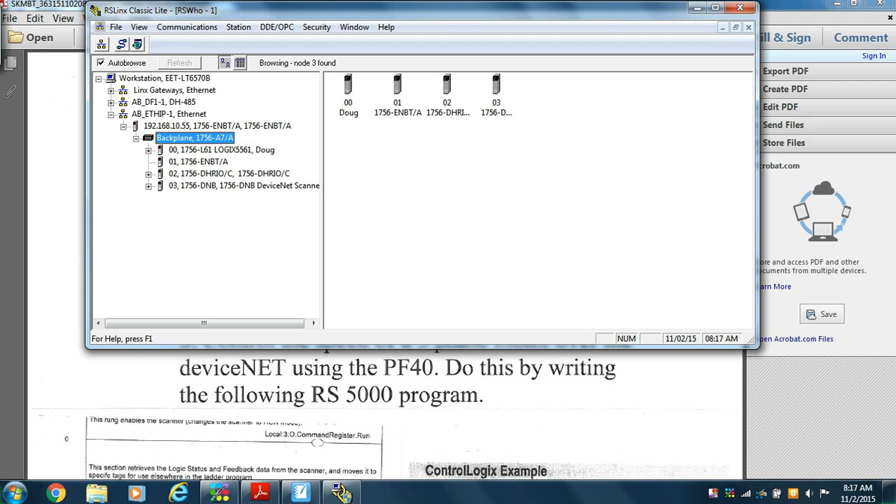And there's the DeviceNet scanner, the DeviceNet, and a whole lot of things on it, but I know that they're not there because I didn't hook them up. So those are things that are legacy items from this RSLinx and aren't necessarily there right now. So anyway, RSLinx is up and running. That's all we care about.

And then we're going to come up in a program called RSNetWorx for DeviceNet. RSNetWorx for the DeviceNet. And here we're going to make a program that sees only the things that we want it to see. And this particular program, when we save it, will have to go into our ControlLogix program, our RS5000 program. So that's why it says do this second.

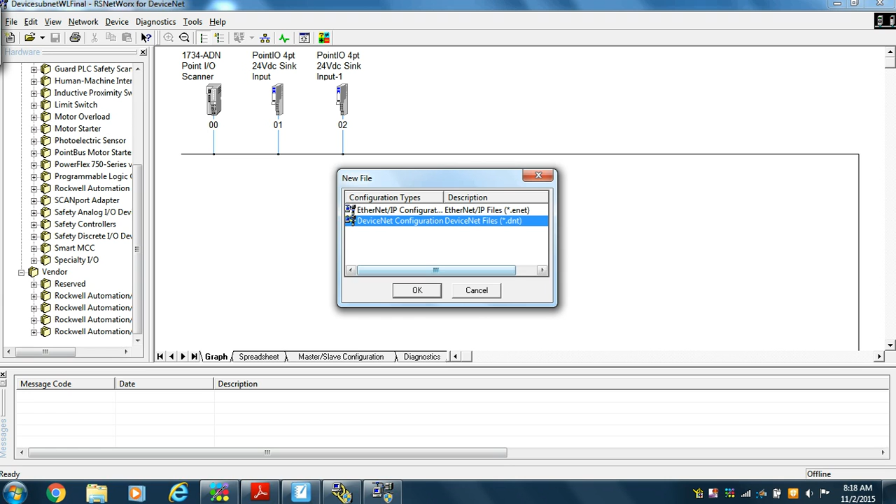The other thing you're going to need, which I already got, was the processor and the DeviceNet card that is in our ControlLogix. Okay, so what we're going to do is go to New, because obviously this is a new configuration and we want a new DeviceNet configuration. All right, and then we're going to go find it.

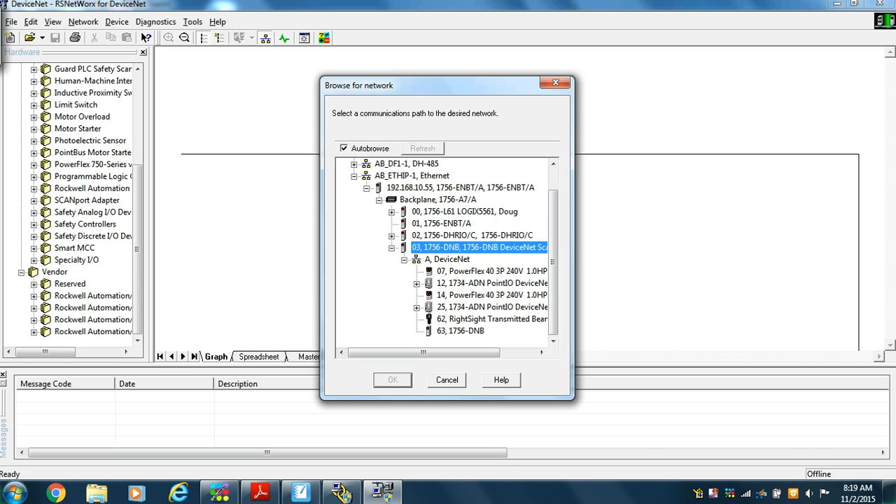And so there's 1, 2, 3, and there's the DeviceNet scanner, there's the DeviceNet. And you notice that when I was back on something else, we'll move back, the OK doesn't say OK. But as soon as I get to the DeviceNet, it says OK. So now I'm going to go and scan the network for the devices that are on it.

And this is going to take some time. So what I'm going to do is I'm going to stop the video. No, well, it's not going to take that long, I suppose. But it has to look for addresses all the way up to 63. And we're at 2 already. So we'll keep the video going just so you can see what it's doing. And there's the PowerFlex, so that was cool that we had its address be 7 so that it would get there soon and have something to look at.

The next thing we should see is probably the electric eye guy I have hooked onto the DeviceNet network right now that I was using to just see if I could see it. That will be the next guy we see. And then the DeviceNet scanner, I think, is all the way up at address 63. And we're gonna have to wait for this all to scan the whole network. We don't really have a choice there. So don't be hitting cancel. Don't be hitting the red mark. Let it do its thing.

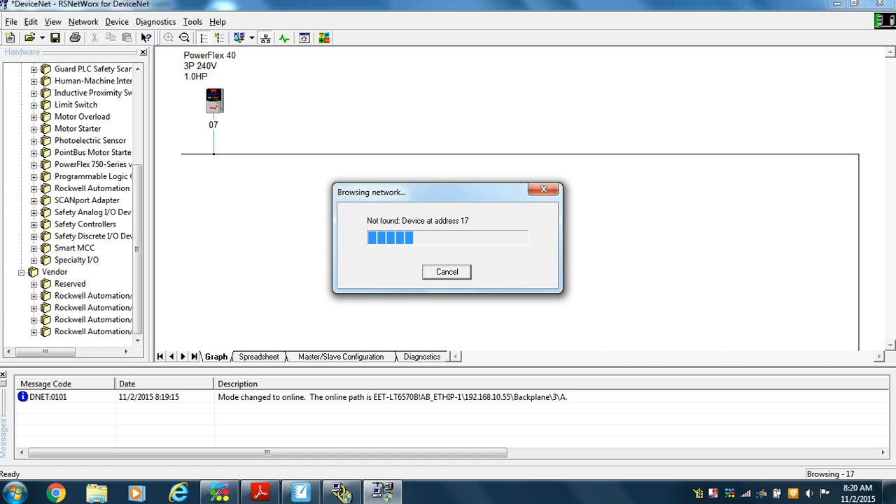So we made it all the way up to 63, and we see we do have an electric eye, and we're gonna cut it because we don't need it for this project. So that's what you do. You cut out anything that you don't necessarily need. The next thing we're going to do is we need to know everything there is to know about these devices. And that's something that we can't do manually.

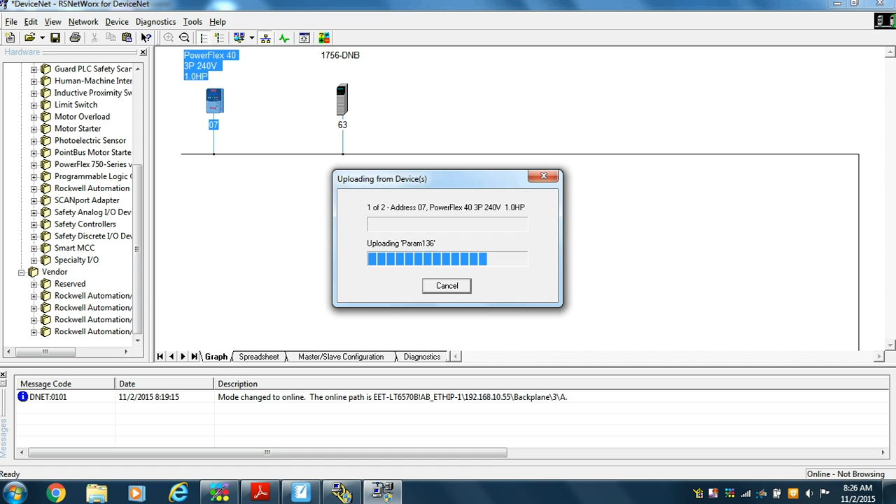So we're going to go to Network, and we're going to upload from the network everything that can possibly be known about these devices. So in the case of the PowerFlex, there's all the programming parameters that could be loaded in. In the case of the DeviceNet, there's all the locations and all the integer files that are associated with it. Okay, so now we have all that information.

We're going to click on the PowerFlex because we left it in 3-wire control and variable speed and frequency control 0 to 10 volts in our last project. And that's not exactly what we want. So we're going to go and group our parameters so that they're grouped. And we're going to look at the basic programming parameters first.

And we're going to say, well, the start source, we don't want it to be 3-wire control. We want it to be from the COM port.

Okay, and the frequency control, where's frequency? Right there. Speed reference is now 0 to 10 volts. No, we don't want that. We want it from the COM port. So now the COM port is going to be controlling whether or not it comes on and off.

Now, if you look at the diagram of the PowerFlex wiring diagram, you see that there's a wire hardwired in between pin 11 and pin 1. Currently that's not there. That's our emergency stop button on our last project. We're going to have to put that in order to make it work. I hope I remember to do that.

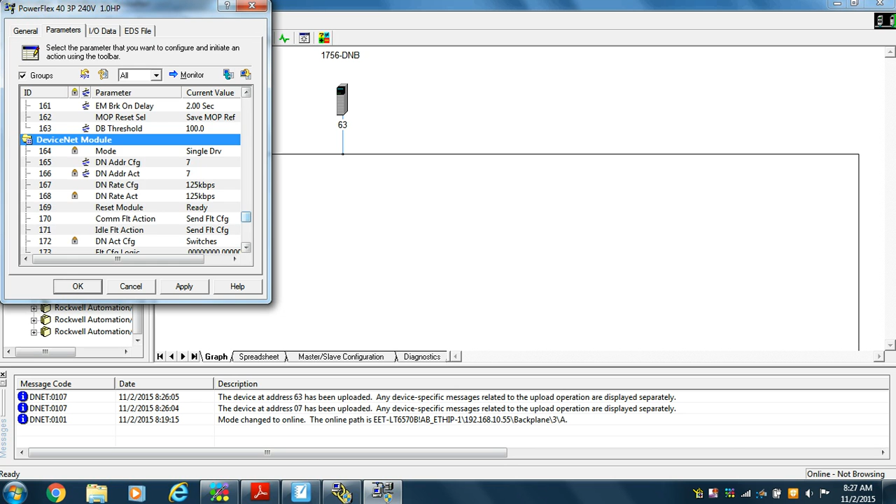But you see that we can also do all the advanced parameters, which we don't necessarily need for this project, and we can do the DeviceNet module itself, what speed it's going at, what it's doing. But that didn't change anything. It hasn't changed anything in the PowerFlex yet. But if we go Network, Download to Network, then it's going to load those guys in.

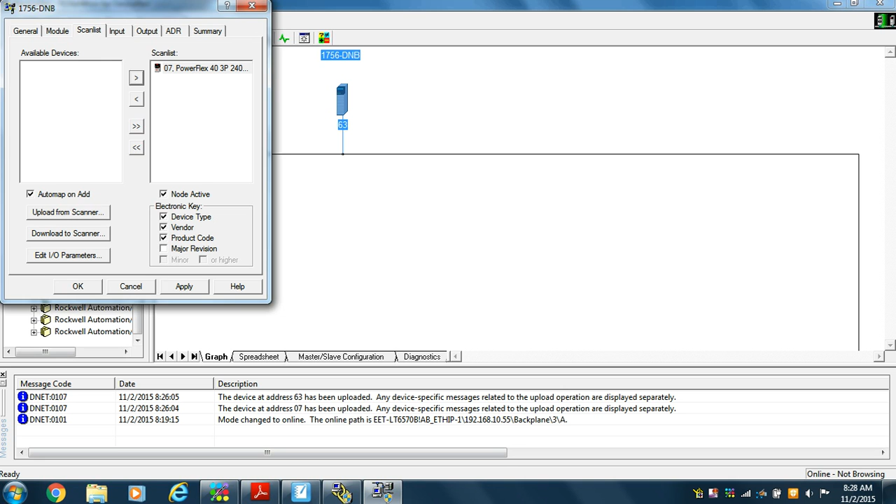But before we do that, we're going to look at the properties of the DeviceNet scanner, and that doesn't seem too bad. Right here is what we're worried about. What's on the scan list? Well, we obviously don't need those guys on the scan list. The scan list are the things that it's going to go looking for. So we're going to apply. We're going to take this off the scan list and put it back on. And we'll know why we did that later. Okay, so we're going to apply that.

Now, the reason that we took those other guys off the DeviceNet scan list was because they were also here in the inputs and the outputs. And then we moved the PowerFlex in and out so that it would be at input at data 0, which is where we want it for this particular project. And so that's just the way it is.

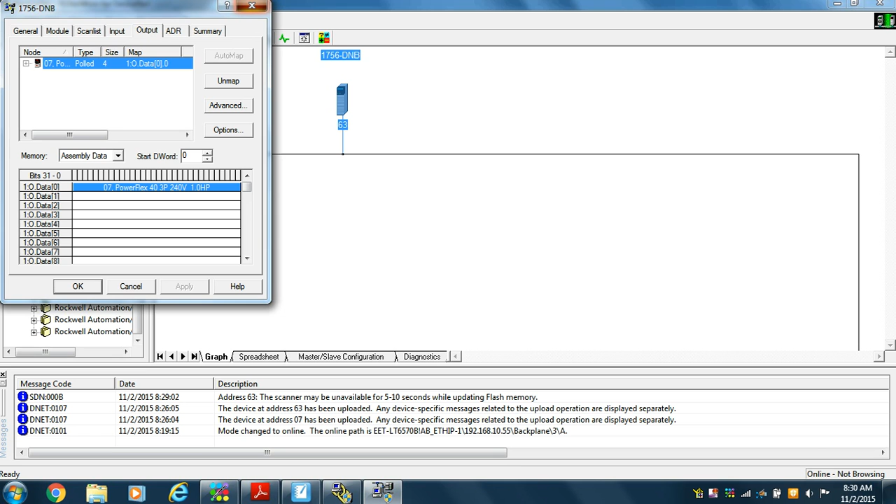Okay, so that being the case, we are ready to go to, oh, we have to save the program, right? So File, Save As, and we better put it someplace where we know where it is. So we'll leave it in Networks, that's fine, and we'll call it Fall 2015, and I'll use my name Doug so that I know where it is.

And so that's the folder we're using, and we're going to save it as project, if I could spell project, 1, DeviceNet. And we probably should spell DeviceNet correctly. Okay, and maybe if we're lucky we can find out where that is later. Notice that this guy's running. This program will have to be running in the background just like RSLinx would run in the background when we're running the program.

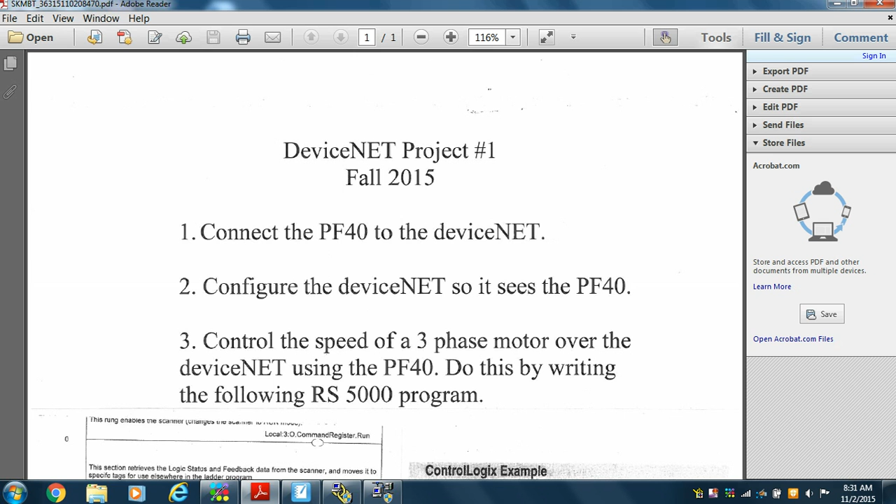Okay, next thing we're going to do is we need to control the speed of a 3-phase motor over this DeviceNet using the PowerFlex 40. To do this, we're going to write the following program. So we have a program that needs to be written. Notice that it has interesting instructions in it, like a copy instruction, another copy instruction. So we're not using moves like we did before in 500. This is 5000 stuff. All right, that being the case, we are going to go and see how we're going to write this program.

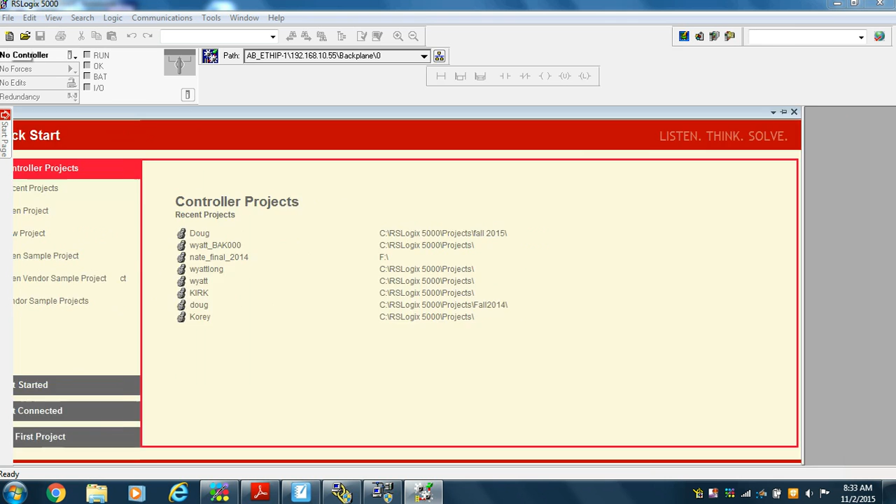So we're going to come up in RSLogix 5000. There it is. Okay, and we'll start with a new project. And we know that our processor is a 1756-L61 because we looked at it. We know that that's the case. The revision. So what revision is it?

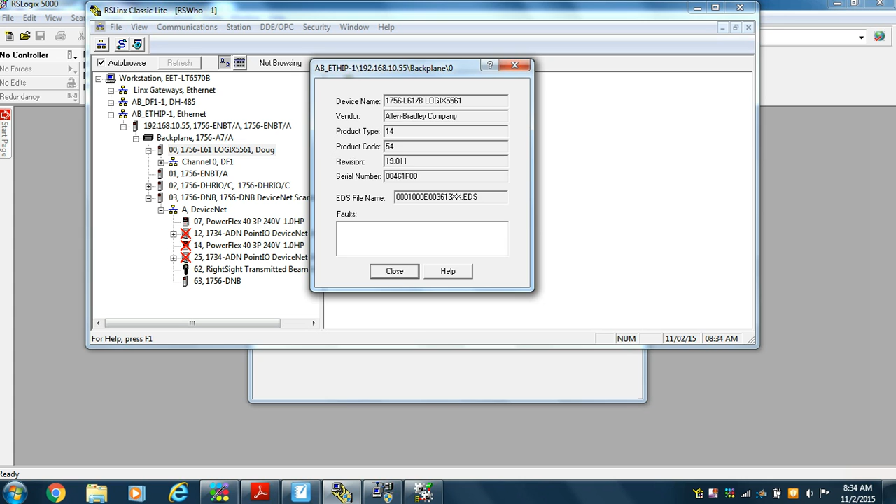Well, that's an issue that will be resolved. The problem is if I open up the box, it'll say it's revision 19. But if I come into RSLinx and I come up on that processor, where is it? And I look at the properties, it tells me that I'm revision 19.011. Okay, so that's where I would get the revision from. I can pick a revision higher than that one, and then it would update to the new higher one, or I can just use 19. And in this particular case, I don't have much choice, do I? So I'm going to pick 19.

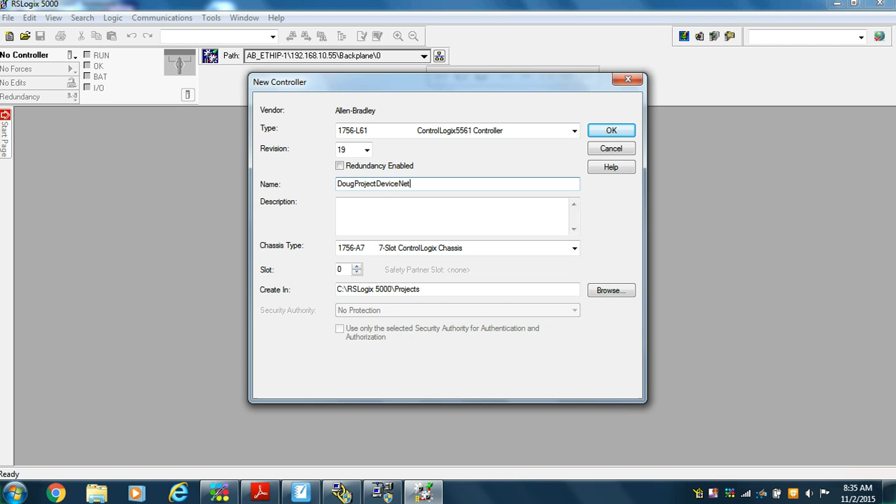I need to call it something. I'm going to call it Doug. I have a 7-slot chassis, and the processor is in slot 0. And I'm going to create this in the 5000 project area. Okay, well that's fine. So I'm going to do that. And that already exists, so I'm going to call it Doug Project number 1. Oh, can't have number, but I can have 1. And I can call it DeviceNet 1. Well, that seems like a reasonable thing to do.

Okay, so now the next thing we're going to do is deal with the input-output configuration. Now, the way we dealt with that in 500 was we did a who's active online, and then we read the input-output configuration. The way we do it here is that we add things that we need.

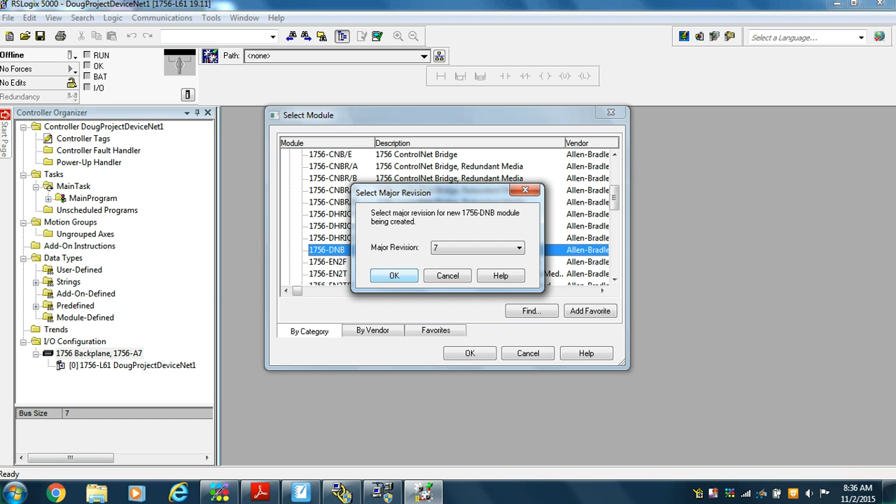So right now, I need a new module, and the module I need is a communication module, and it's going to be a DeviceNet scanner, 1756-DNB, and I know that because I looked at the card already. Revision, I know it to be a 7, so I'm going to use revision 7, and I got that from the card. I pulled it out of the de-energized holder and looked at it, so I knew what it was.

I'm in slot 3, so I'll change that to slot 3, and it's 7.1, and it needs a name. So we'll call it scanner. Okay, and we seem to be all right there. Now, if I look, I see I have a place for the RSNetWorx program that I just made. Okay, so I'm going to go and find it.

So it's not in projects, it's someplace else. Where is it? So it's in RS5000. No, it's not. Now I'm going to have to remember where it is. Alright, so we'll try it again. Come in through there. Program files. Rockwell Software. How come I don't see

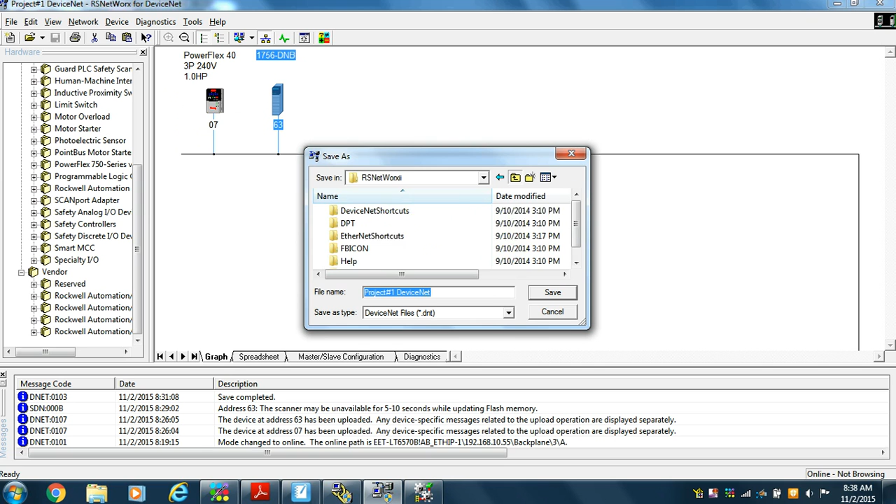Okay, we're going to go back to the DeviceNet network file, save as, and so it's Doug, I got that. It's in networks, I got that. It's in RSNetWorx, I got that. It's in Rockwell Software, I got that. And it's in the program files x86. Okay, whatever you say, that must be where it is. Okay, so we come back to there. Okay, that's fine.

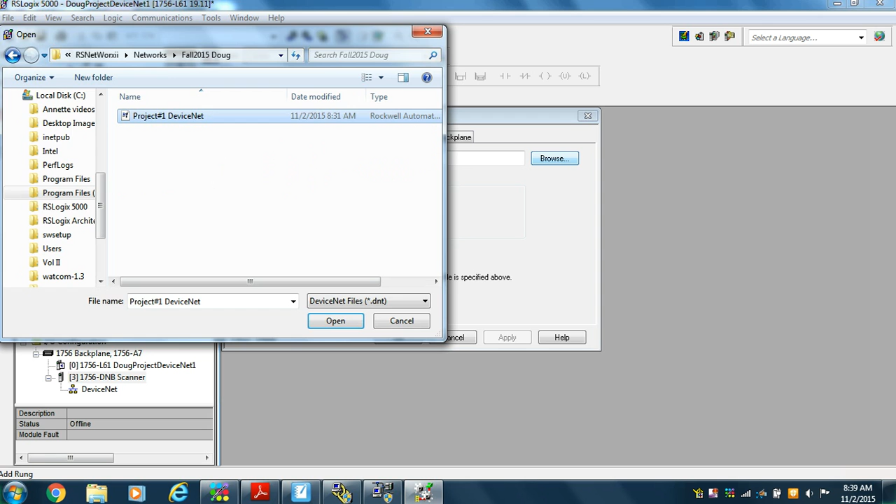And software, RSNetWorx, networks, Doug, whatever. Okay, so we found it, and we're going to apply that to this particular program. So now the DeviceNet file we made in the DeviceNet network is now in our scanner, ready to go.

Okay, now in 500 we had a group of tags, addresses, our outputs, our inputs, and whatever. That's not true anymore. So the controller will have tags, and we look at them, and there are all the tags. So there's these Local:3 inputs and outputs and status. Well, Local:3 is this DeviceNet scanner. So I look at Local:3 input and I see a status run, and then I got an output and a command register there, and then I've got the data.

Well, this is the data that's going to and from the PowerFlex. And when I did the scan list and I put it in a particular position, that's where it is here. The data itself is a double integer file that's 124 double integers long. Okay, so back to what we're thinking about.

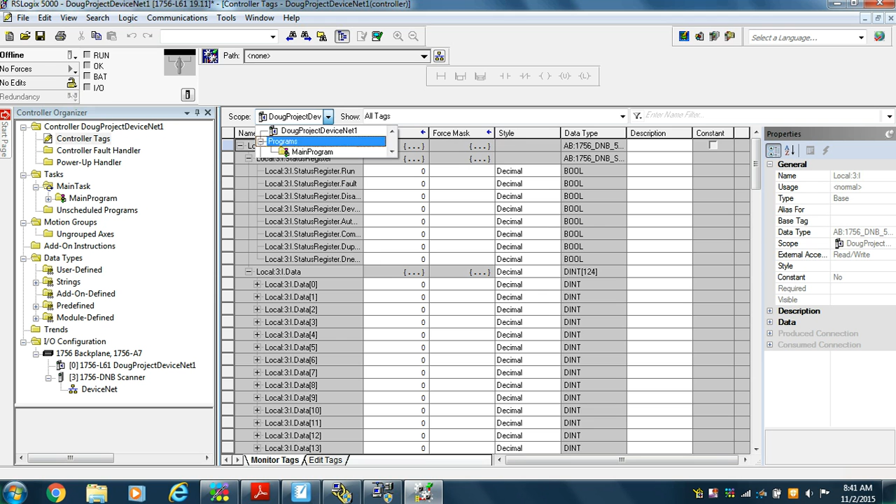Okay, we're going to come back to tags. There are program tags, and then there are controller tags. So the program tags are things that we have to make as well. So we have to make our own tags. That's the bottom line. So we're going to go to Edit, and we're making program tags. And on our piece of paper, you saw a partial list of all our tags. If we go back to there, we see that there's the local guys. Well, you don't have to make them, but you do have to make these Boolean guys and these integer guys. So we'll commence doing that.

All right, so we need to have a drive command clear fault. And we want to make the name as descriptive as we can make it. Now the data type is going to be Boolean, so that's basically a binary bit. That's all it is. So instead of having B3:0/4, we have drive command clear fault. All right, now we need a drive command jog, and that's going to be a Boolean guy.

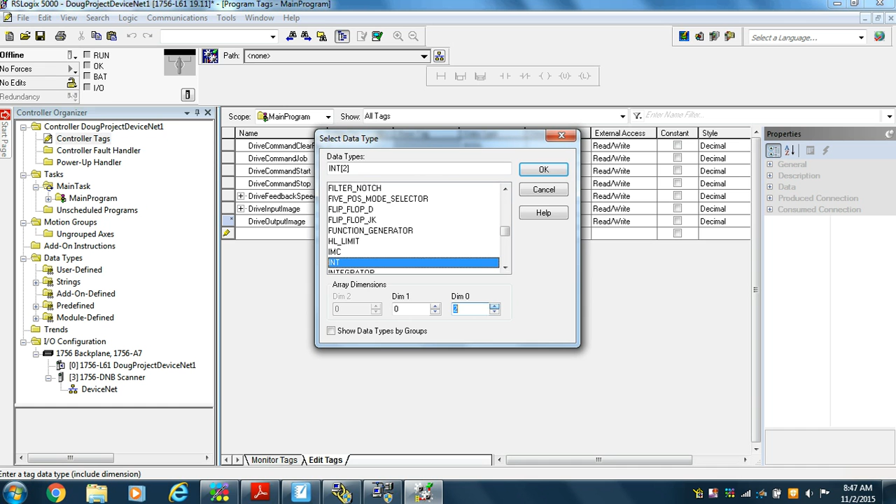Okay, and then we're looking for a drive reference. Now let's be clear, that's the speed we want it to be at, and we want that to be just a single integer. And then we need a drive status faulted, which we don't want to see, and that's a Boolean guy. And drive status running, and we want him to be a Boolean guy.

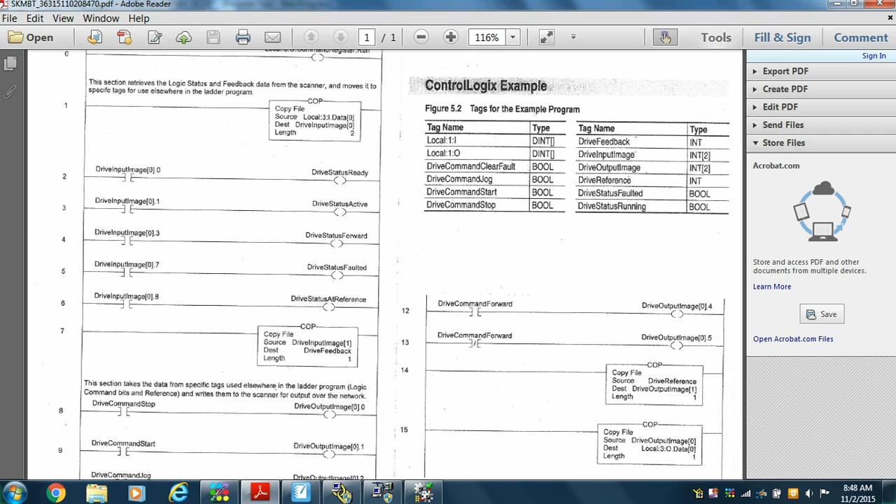Now we have to make up the tags for everything we need. So I look at the program: drive status ready, drive status active, drive status forward, drive status at reference. Why don't I see them? Drive command stop. Okay, I see that one. So I still have some other guys to put in here. And I need a drive command forward. So I need at least 4 more tags before I can call myself done.

Okay, so we're going to go with drive status ready, active, and forward. On program. Drive status ready, drive status, if I could spell status, active, and drive status forward. And each of those need to be Boolean, so we'll change them to Boolean.

Alright, so we'll go back and look at our piece of paper, and we're still looking for a drive command forward. Command forward. And I think we need an at reference, right? Drive status at reference. That means that we have reached the speed that we're supposed to be at. And that needs to be Boolean, and this guy needs to be Boolean. Well, that didn't help any, did it?

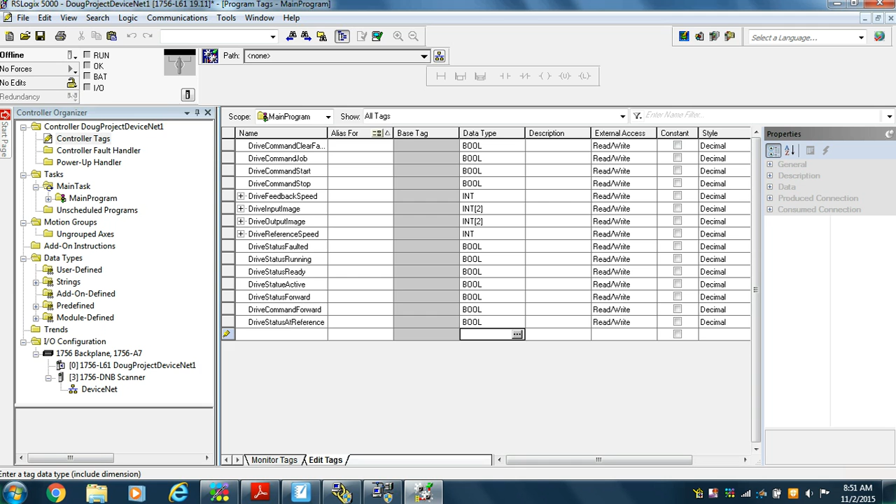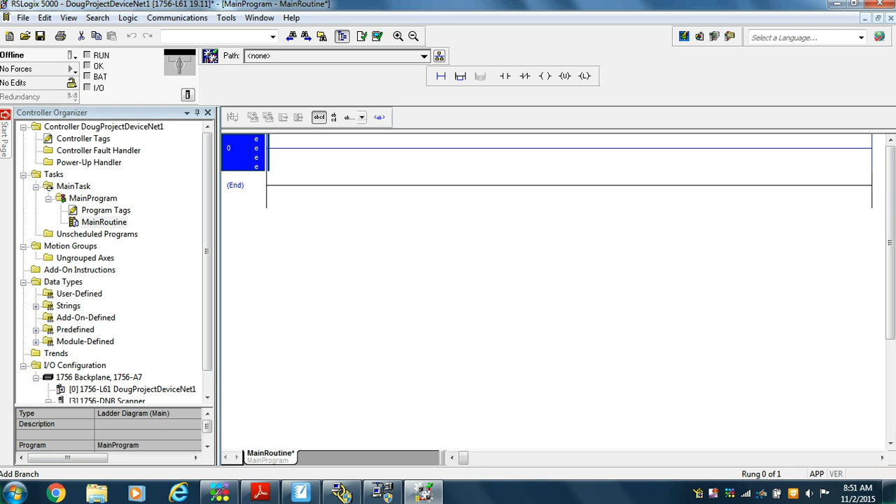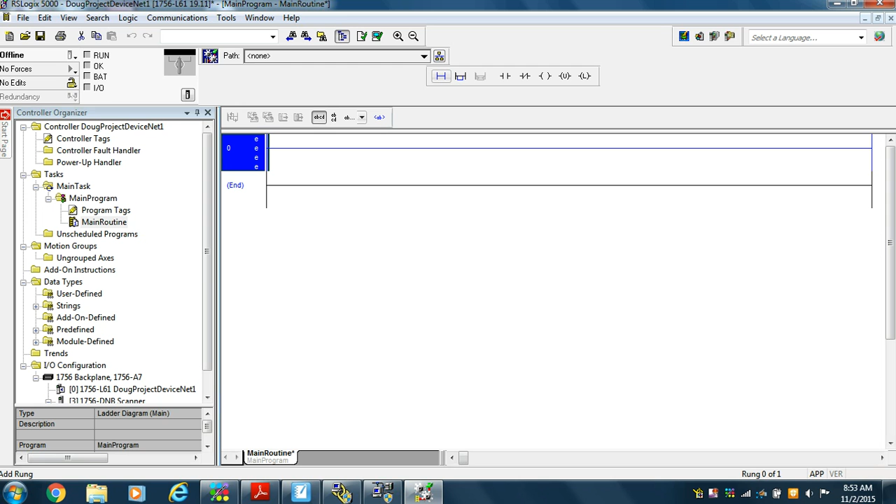Alright, so that's probably all the tags we need. Now we're going to go to the main program and look at the program tags. Those are the guys that we just made. And then we're going to go and write the program, and we're going to need rungs up to 15. So, okay, back to our program. We need 15 rungs. 1, 2, 3, 4, 5, 6, 7, 8, 9, 10, 11, 12, 13, 14, 15.

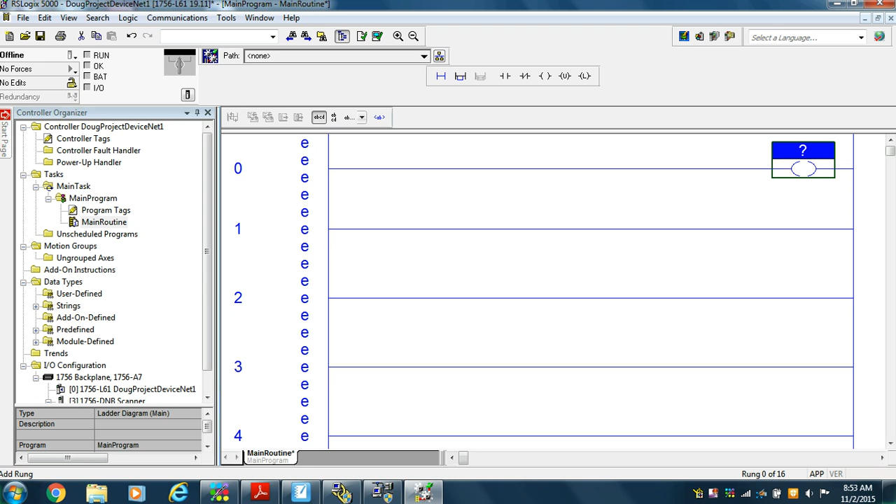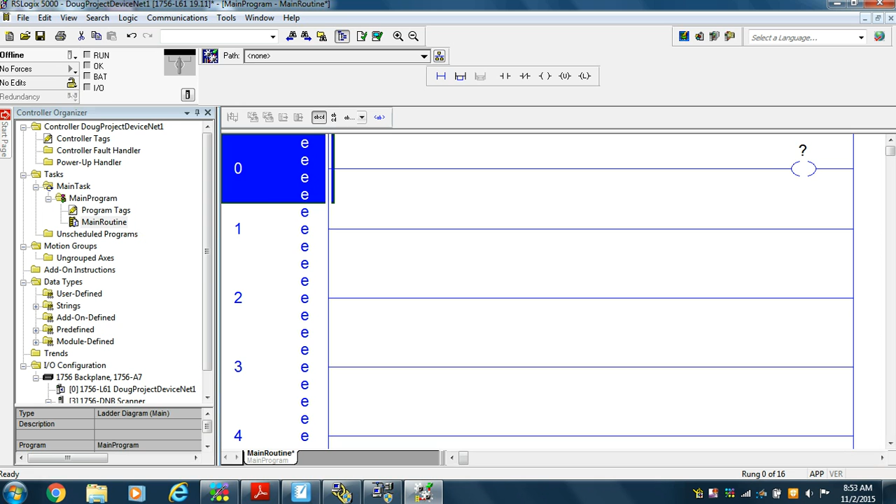Okay. In my first rung, well, got to get back to the top though. My first rung, and why don't we make this bigger? Oh, that's much bigger. We want to turn on the DeviceNet scanner. I double left mouse click, I come down, I want my controller tags. I turn off my program tags, and I want Local 3 output, and there's the command register, and I want the run command. So I'm not typing any of these things in, I'm just going and getting them.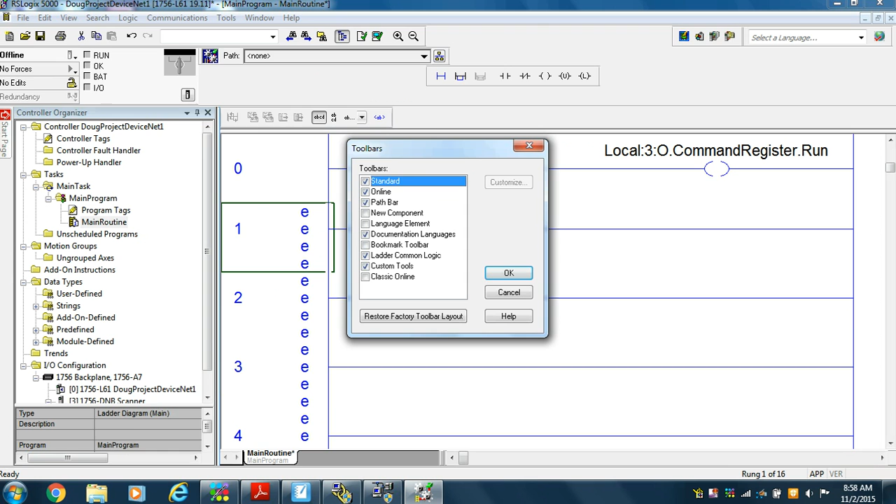All right, now I need to find the copy command. Okay, I'm back again. What I did is I hit Restore Factory Toolbar Layout, because I've been trying to find my tools and I can't find them. So I went to View, Toolbar, and then Restore Factory Toolbar Layout. I'm not back to where I want to be yet, but I'm going to be there pretty soon as I say OK.

Now I'm looking for the copy command, and it's probably going to be with the move guys. No, it's not with the move guys. There it is, copy. So there's the copy command, and I'm copying the input data.

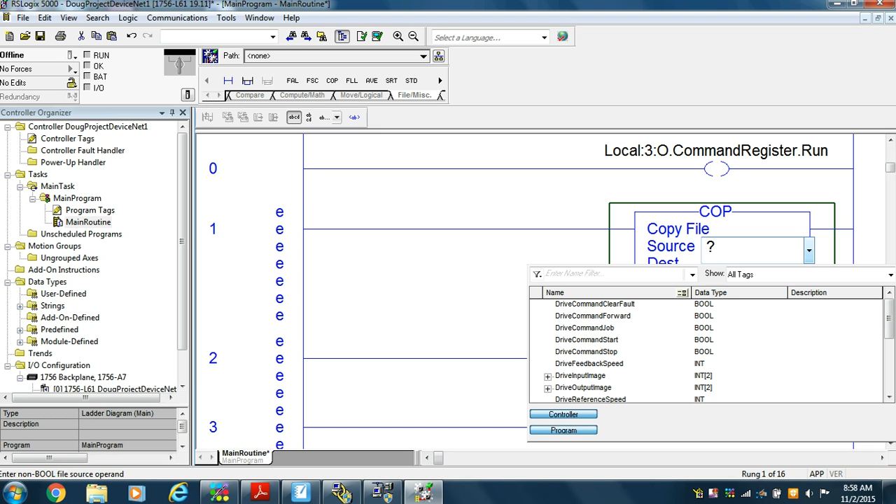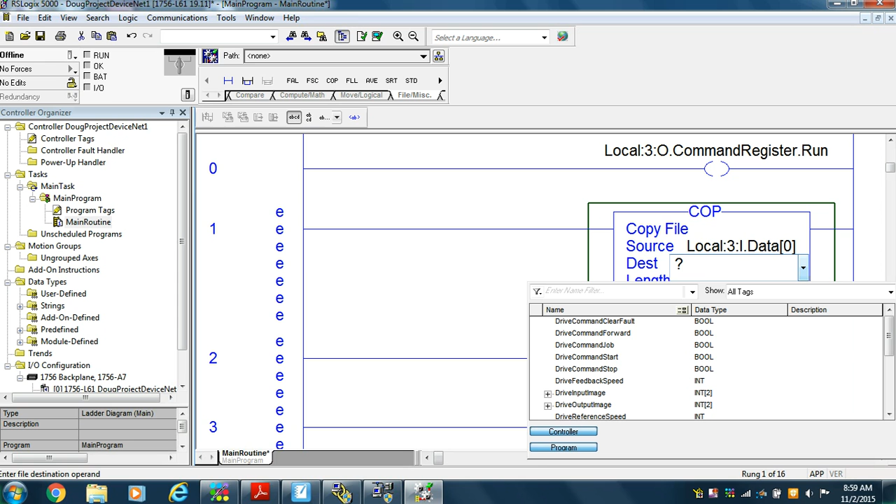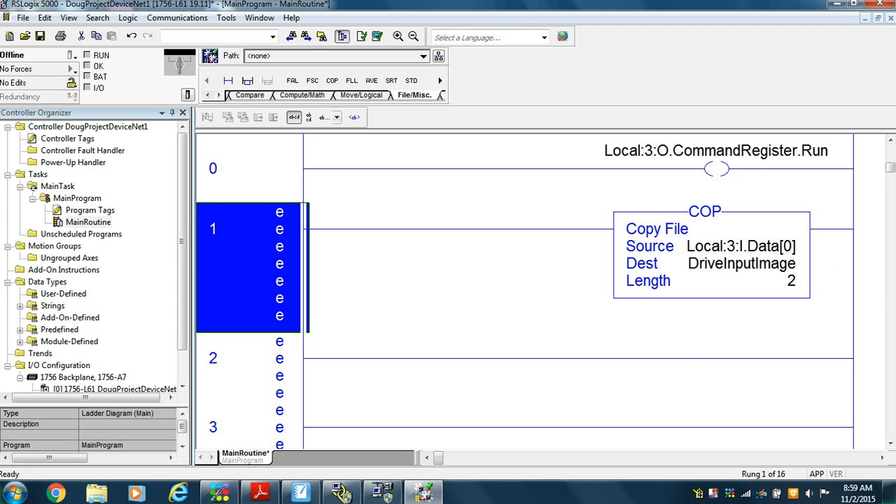Okay, so down arrow, we want to only look at him, and we want to look at the data, and we want to look at data 0, because as you recall, that's where we put it in our scan list. If we were to put it in someplace other than data 0 on our scan list, then we would have been looking for it there. Destination, I'm doing a left mouse click again to get there, and I'm going to put it in the drive input image. So drive input image, and the length of it is going to be 2. So I'm taking a double integer word from the PowerFlex, and I'm putting it in 2 integers in the drive input image. One of those integers is the speed, the other integer is the commands for making it work.

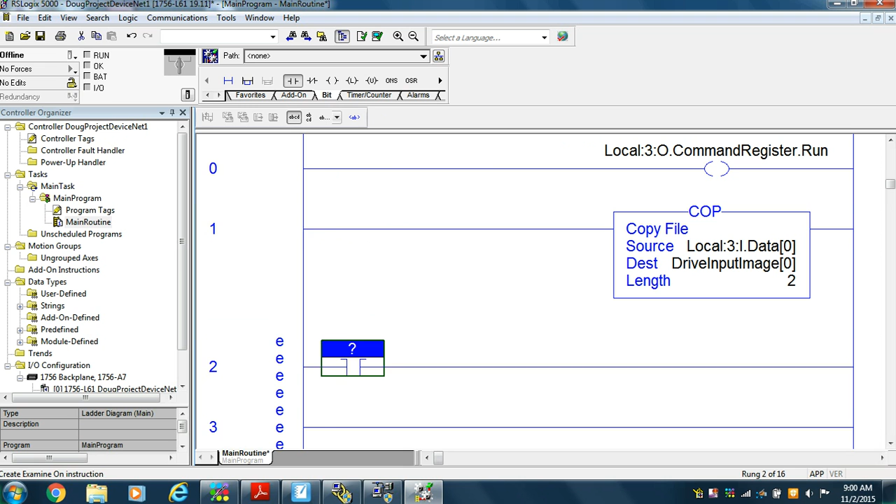Okay, now there is an issue here, because you notice on rung 1, the E's went away when I had it right. So I'm looking back on this and I'm saying, well, this guy's not right. We're supposed to be picking 0. So it would make sense to do what we did, but we can't do that. And length 2 means I get the 0th one and the first one, so that's pretty cool. Okay, now we need 1, 2, 3, 4, 5. And we'll move back to there. 1, 2, 3, 4, 5 rungs that look like that, and with outputs. Now, all these outputs are there for is to give us indication that the machine's working right or not.

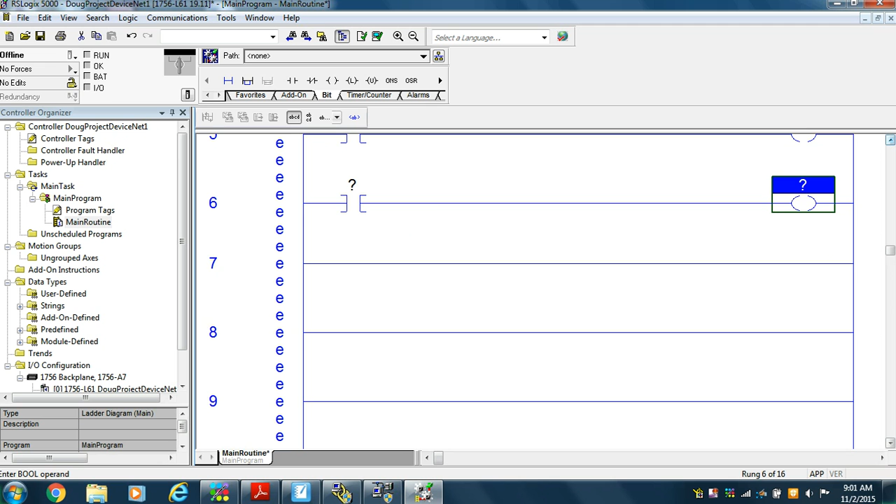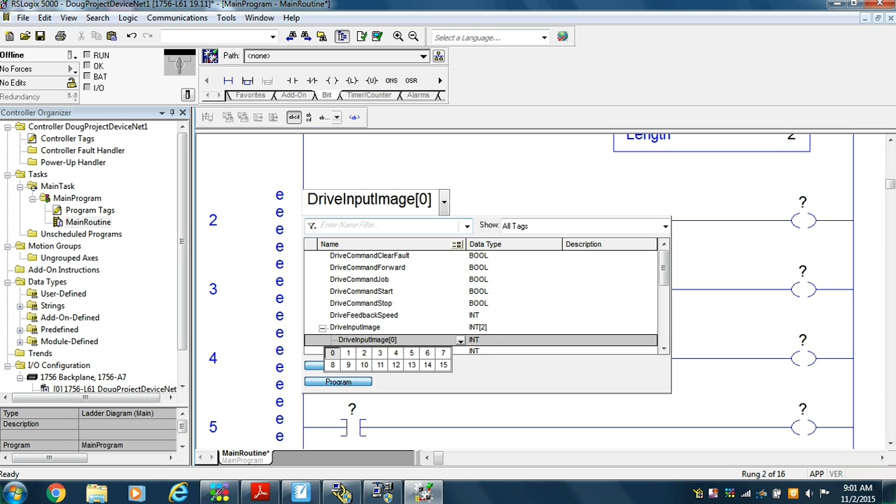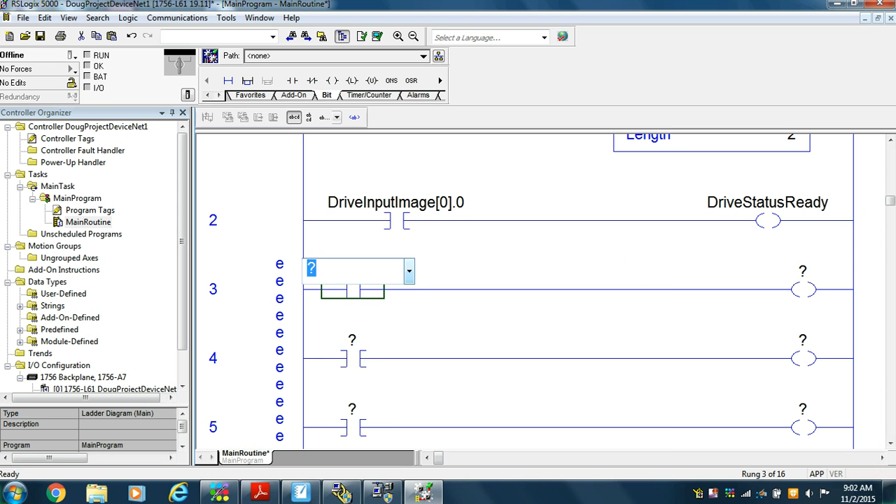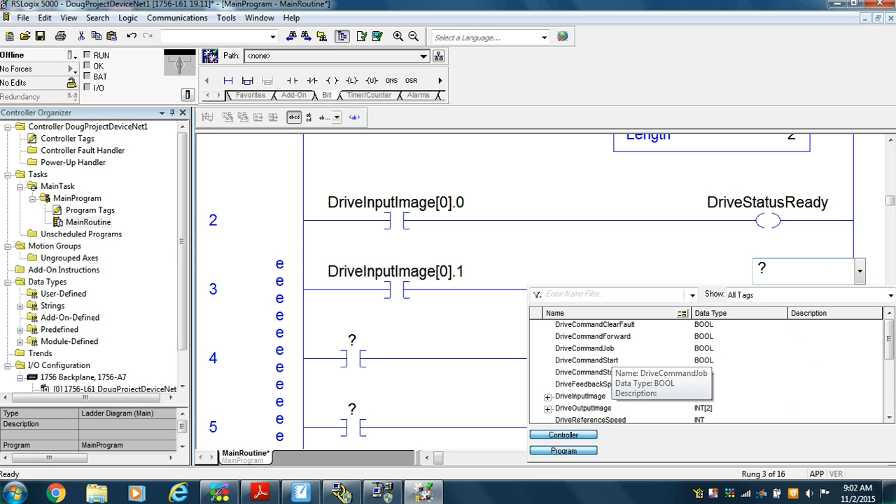1, 2, 3, 4, 5. Okay, I'm doing a left mouse click, and I want drive input image 0.0. Drive input image 0, come to the down arrow, .0. So I don't type it in, I go and I get it. And I'm turning on the drive status ready. Okay, and then I want drive input image 0.1, and then I want that to read drive status active. If I don't get the ready light on, I can't be active. So there's some hardware problem I got to solve before the machine will turn on.

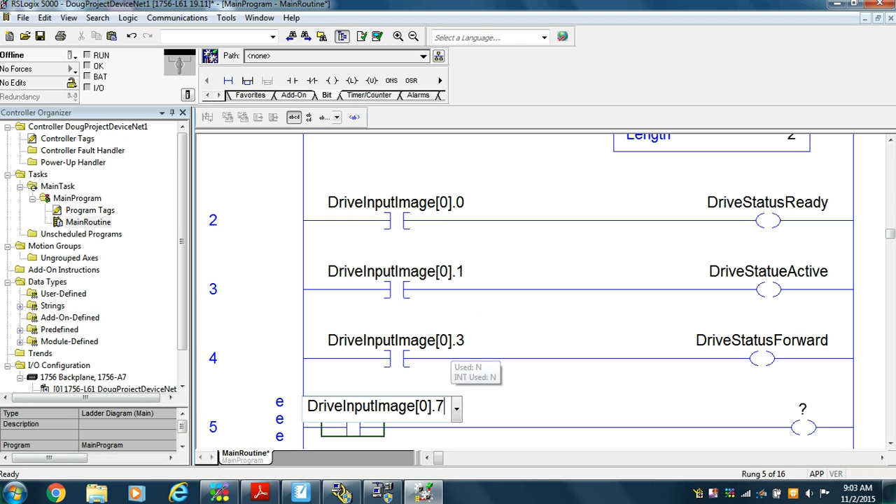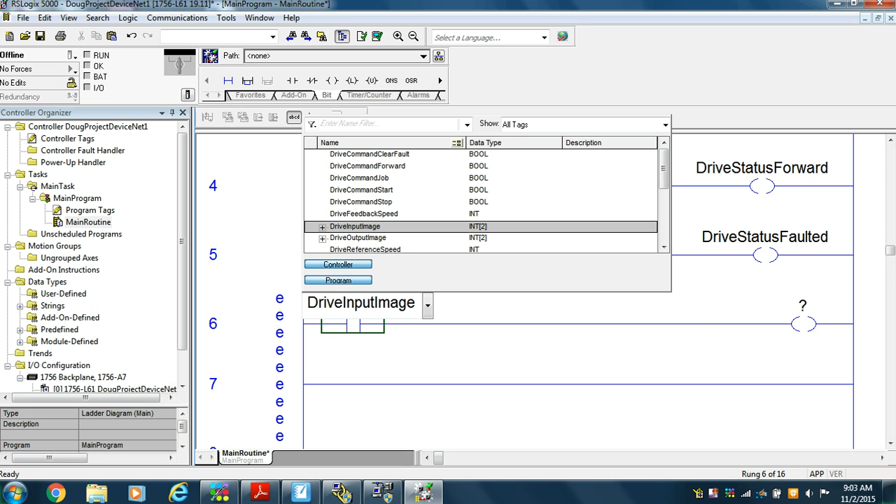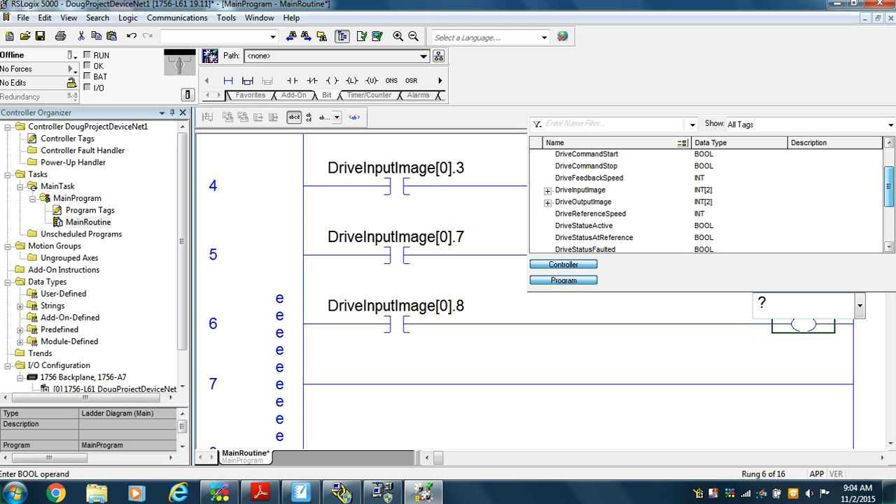Next guy is the 0.3 guy. Input image 0.3, and we want drive status forward. So I'm looking for drive status forward. Then input image 0.7. And that's drive status faulted. Okay. And then we're looking for drive input image 0.8. And we're going to call that drive status at reference, which means that I'm at the speed I'm supposed to be at. I made it all the way up to the speed I'm supposed to do.

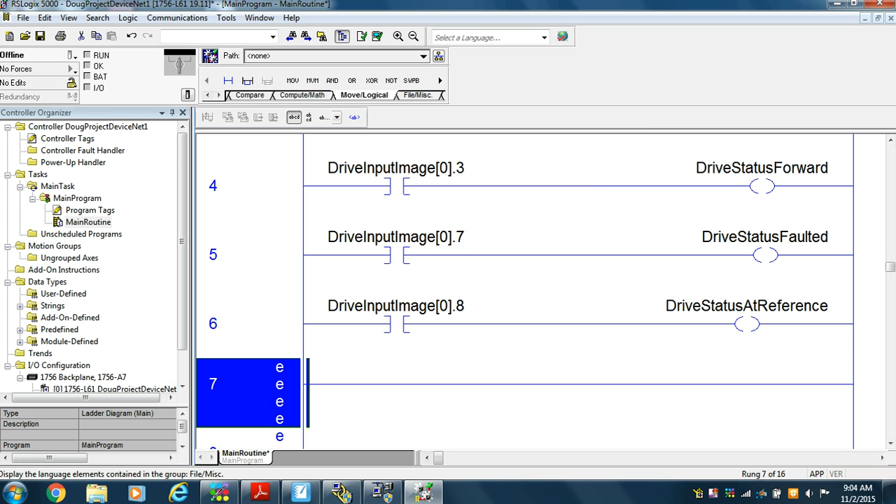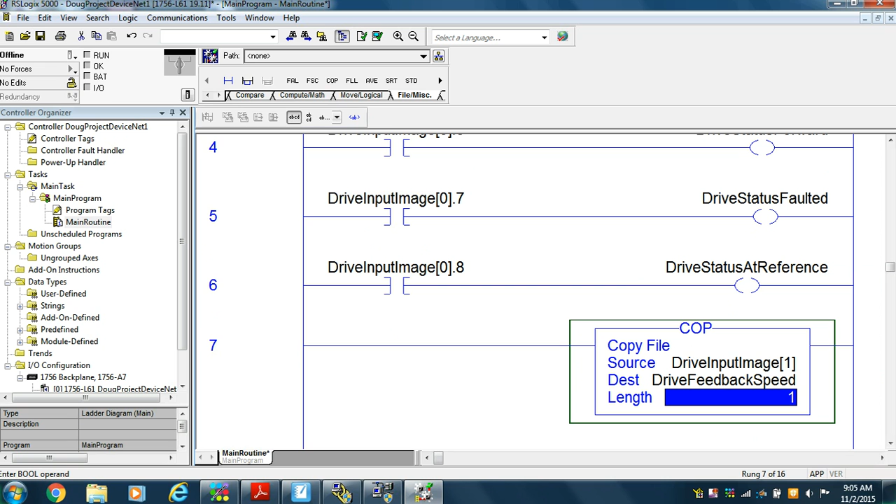Okay, now we need another copy command. So we've copied the, oh, well, it doesn't really matter. Compare, am I too far over? Math, miscellaneous, there it is, copy. So I'm going to copy drive input image 1, and I'm going to put that into the drive feedback, which we called slightly different than drive feedback. We said it was speed, and we want it to be length 1. You notice again that all my E's are going away and it's correcting itself if I've spelled things correctly. I need 1, 2, 3, 4, 5, 6.

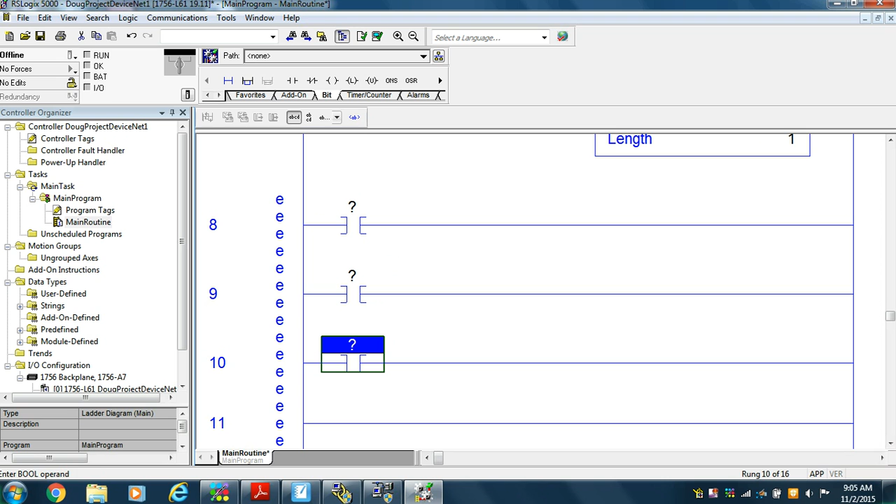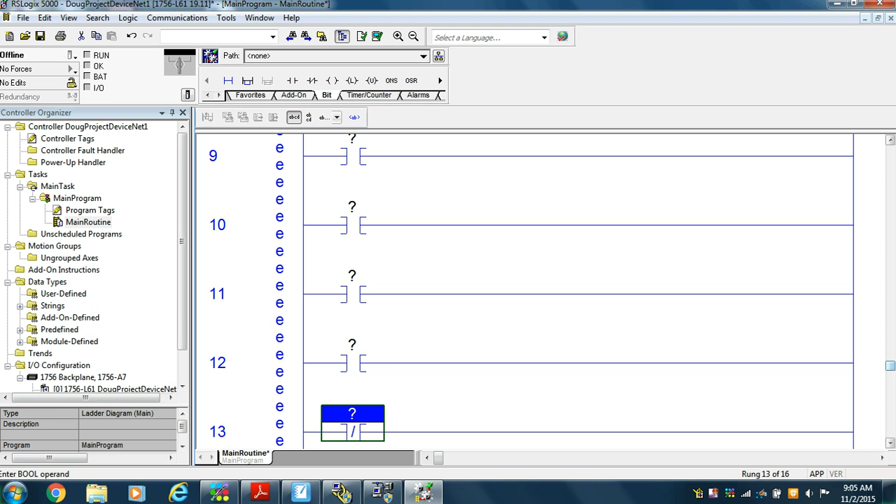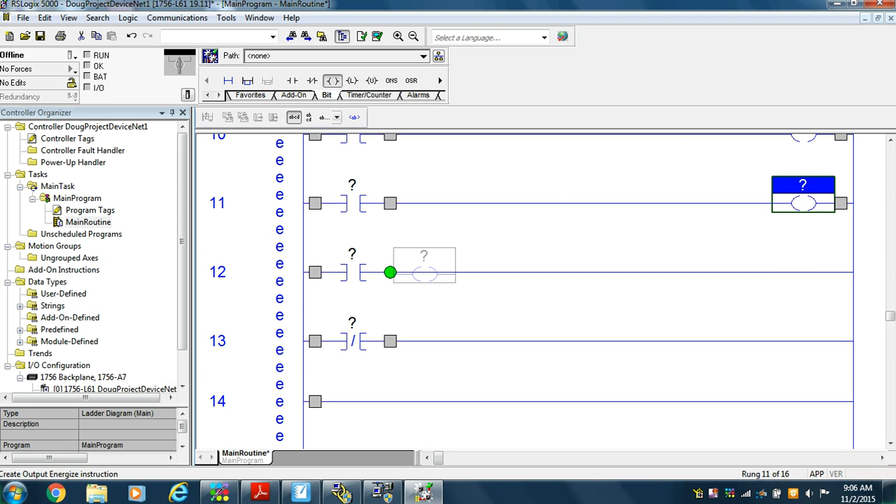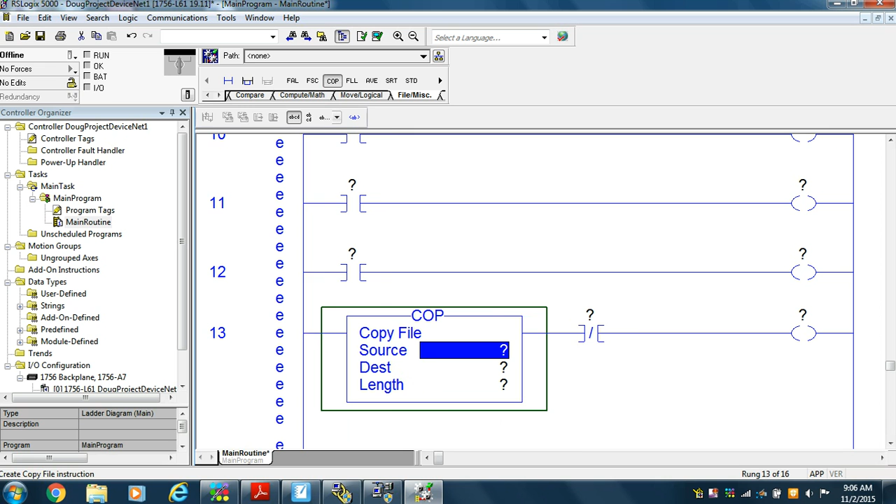Okay, so I need 1, 2, 3, 4, 5, and you notice in rung 13 it's a normally closed contact, not a normally open contact. And then I'm going to need output energize guys on the other end. And then I'm looking at 2 copy commands, so if I go get those copy commands now, I won't have to worry about it later. And we remember that it's in miscellaneous file. And he didn't go down far enough. I got rid of him altogether. Well, thank you very much. All right, there we go. Excellent. Now we'll come up and continue doing what we're doing.

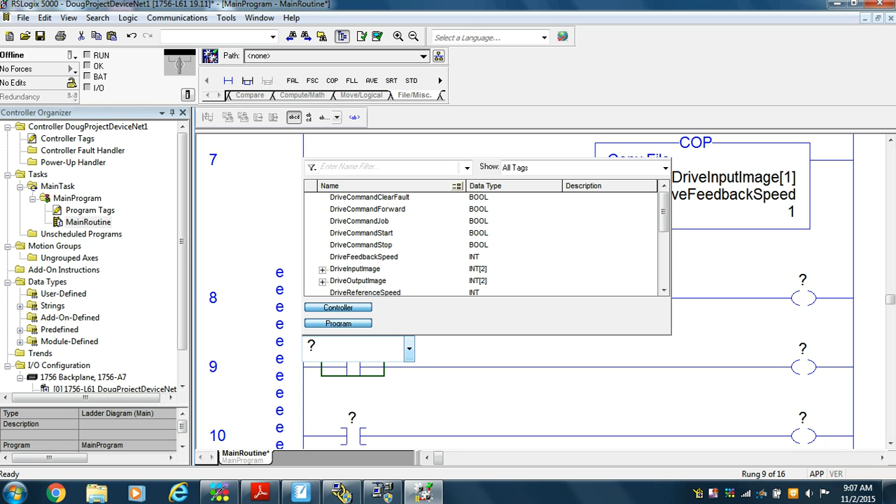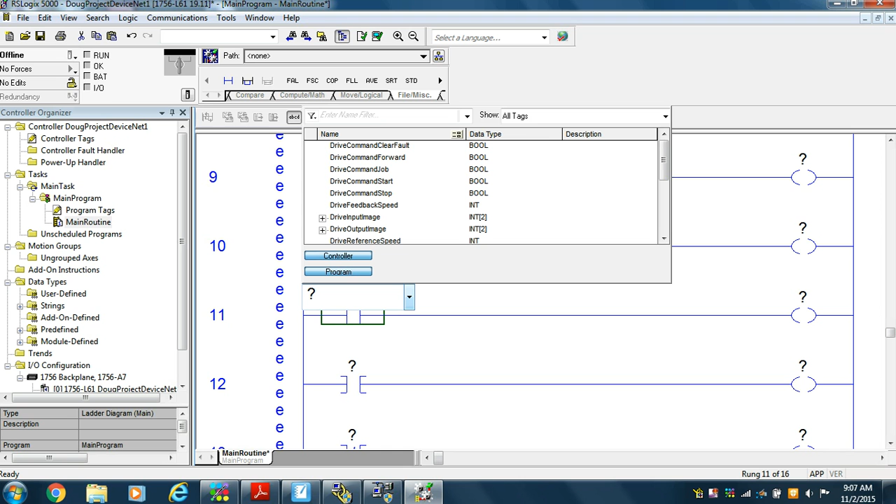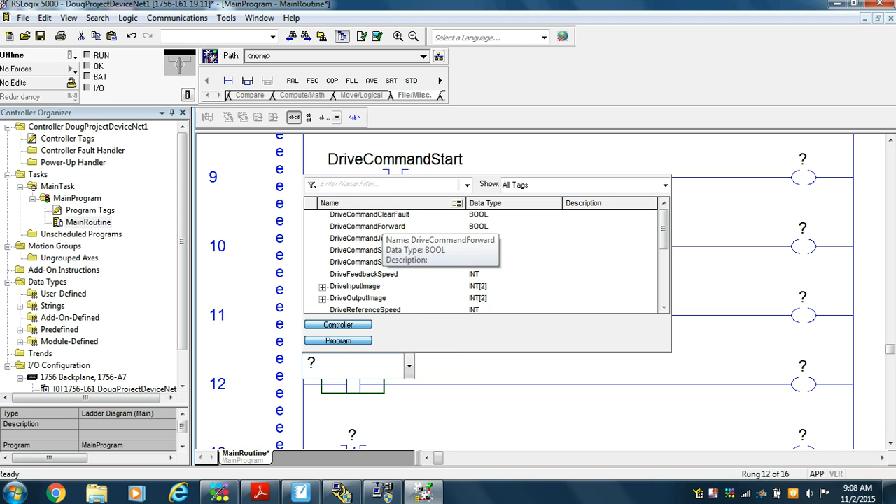Rung 8, drive command stop. Now, the way we did that before is it was normally closed, but this is an active thing. It's going to actually stop it. And next one is drive command start. And then the jog command, which is obviously a big seller. We're probably never going to use it, and why Rockwell wants us to put it in is beyond me. And then we want a clear fault. And you say, well, how often are we going to fault? Well, every time we turn off power, we're going to fault. And what's this guy? Command forward. And the next guy is not command forward, which really means reverse, right? And notice I didn't have to go get it because I was already using it. Okay, back to what we're doing up here.

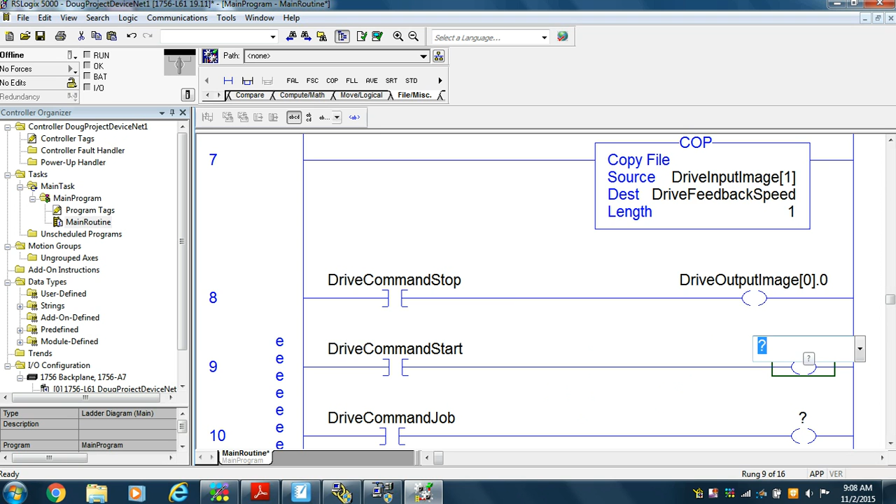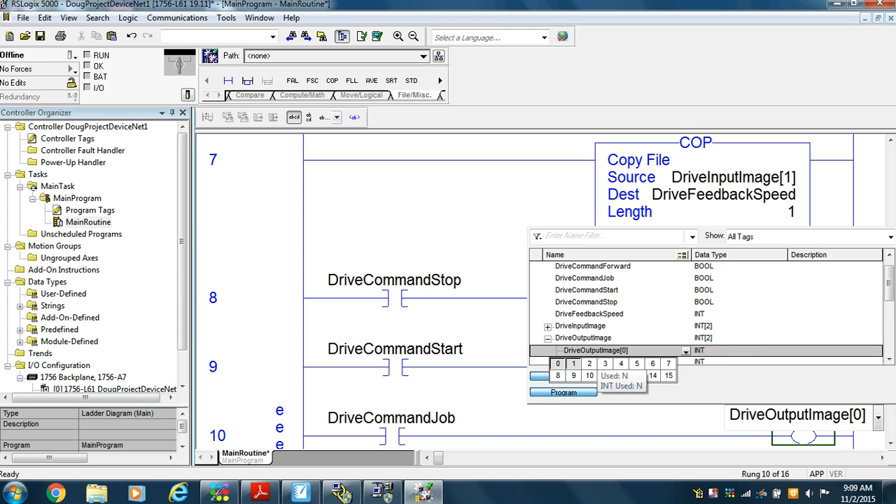And in rung 8, I'm supposed to be the drive output image. Okay, drive output image, and it's 0.0. And drive output image 0.1, and drive output image 0.2, and drive output image 0.3.

Notice that when I use a bit, it shows me that I have. That's so I won't make the mistake of using it again where I don't want to. Drive output image 0.4. And in the PowerFlex, you can't tell it to go forward and reverse at the same time, and that's why we have drive output forward, drive command forward, not drive command forward. So I can't mess up and give them both at the same time. 0.5.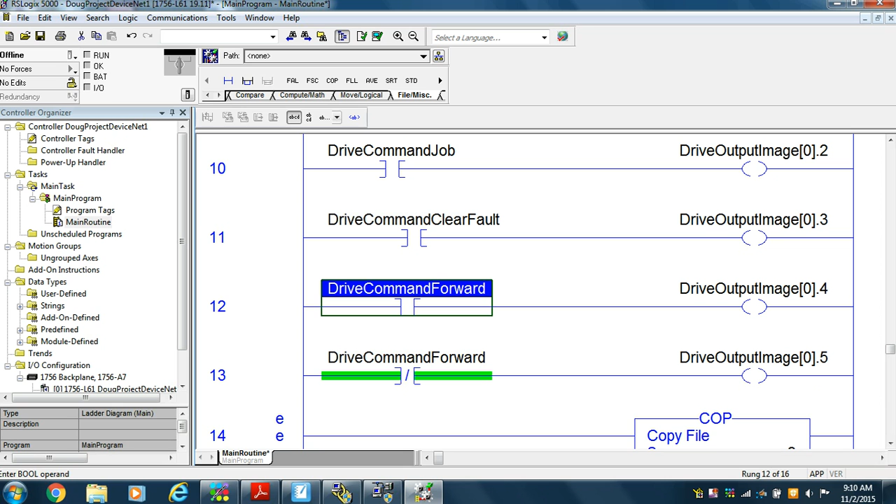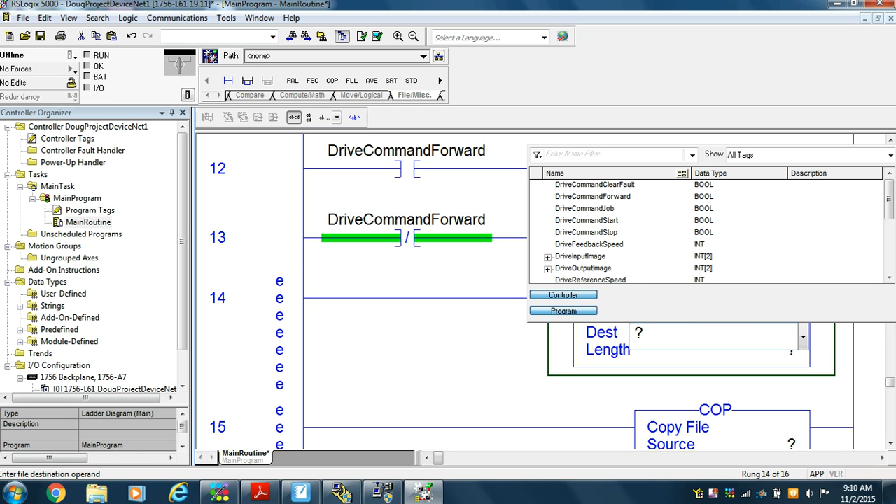Okay, then we're going to tell it what speed we want. So the drive reference, and we added speed to that, is going to command output image 1, which is the second one. Alright, and that's going to be length 1. So what we've done is we have this drive output image that's going to give commands to the PowerFlex to do things, and the speed reference is the least significant of the 32 bits, the least significant word, and then we're going to copy

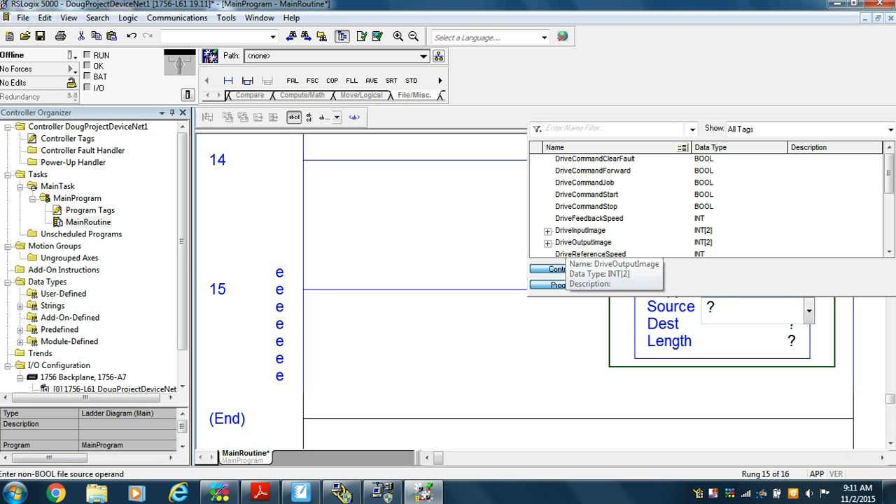drive output image 0 into the output command going to the PowerFlex, which is the data, but it's data 0. And length is going to be 1.

Now this is an interesting thing what we're doing. You remember that drive output image is only an integer, and the local 3 output data is a double integer. What we're doing is we're starting with the drive output image, which is 16 bits at 0, and putting it into something that's 32 bits, of length 1. Well, the 32 bits length 1 trumps the fact that the first one was only 16. So it's going to take both drive output image 0 and drive output image 1 and put them both into the data 0 location.

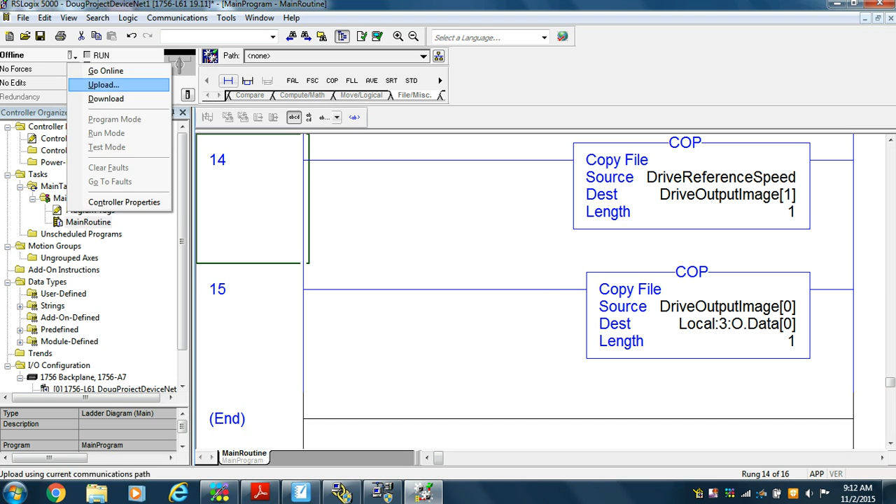Okay, so now we're ready to do a download. We'll check the file first, and we see that there's nothing wrong. We'll go and do a download. Failed to go online with the processor because I haven't established a path. Up here is my path, and I'm going to go to the Ethernet, back into the backplane through there. Notice that it didn't light up saying that I could do any of those things until I got to the right spot. So if I set it to the DeviceNet scanner, you can't put a program there. So there we're fine.

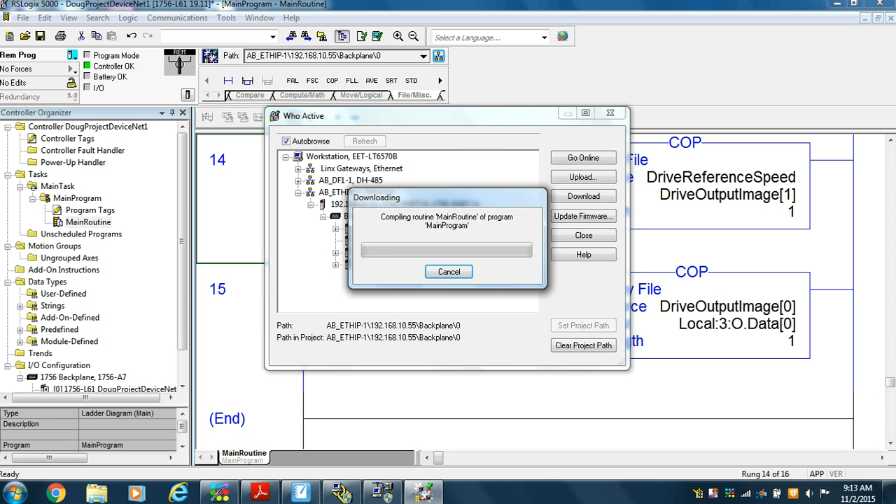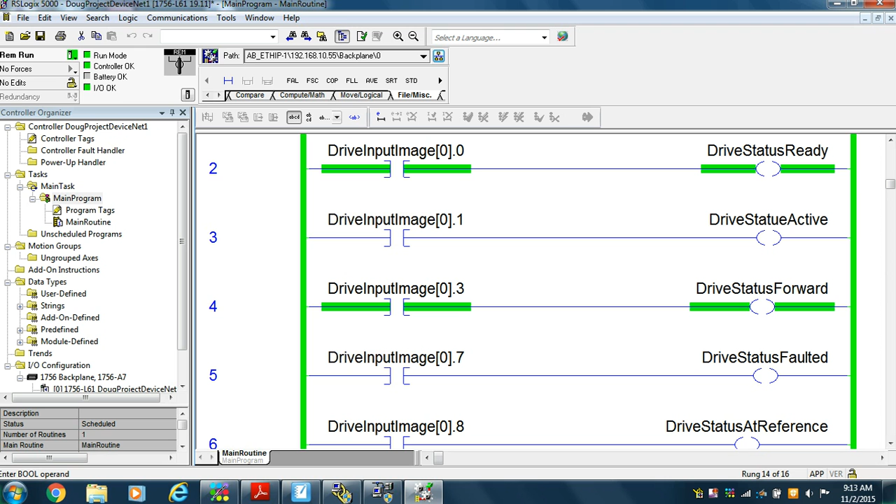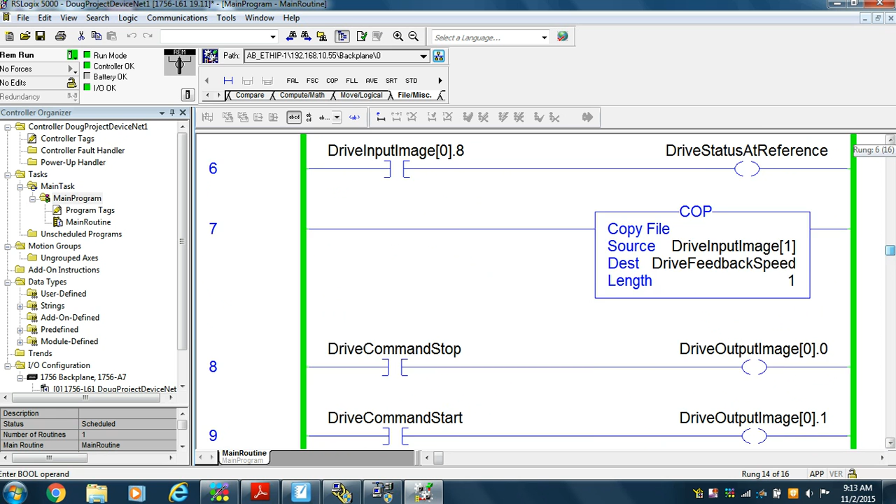We're going to set the path first, and then we're going to download the program, and download. Okay, and then we're going to put the program in run, and we're going to see that my drive status is ready, and my drive status is forward. I'm not ordering it to go forward. It seems like I should be ordering it in reverse. So the bottom line is there's something wrong, and what's wrong is that I need a wire hooked up on the PowerFlex.

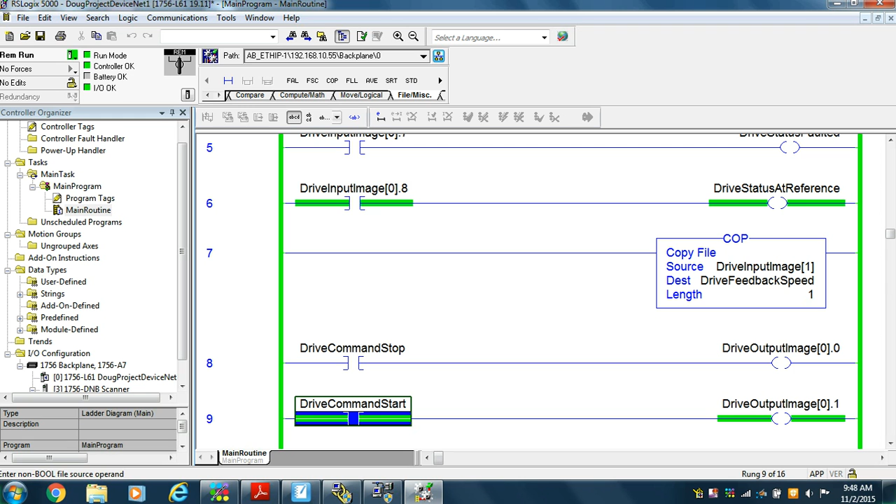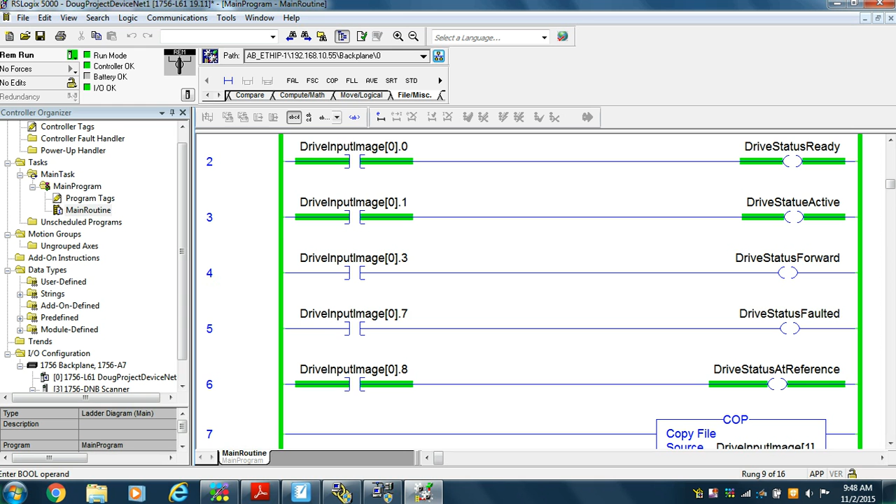Okay, I've been away for a little while trying to troubleshoot what my problem was, and it is rather embarrassing. The sink/source switch on the PowerFlex was still in sink, and because it was in the sink position, the PowerFlex would not give me a drive ready, which it's giving me now. So right now I'm running at speed, which is 60 hertz, because I put in a 600 in the speed reference. I'm running in reverse, so I'm going to command go forward.

I'm going to look at the program tags, and I can see the speed from the feedback slowing down, going through 0, and then coming back up in the other direction. And when I get to 60 hertz, my at frequency, at speed, at reference comes on. I didn't get there in time to see it come on, it was already on. But right now the program is running fine.

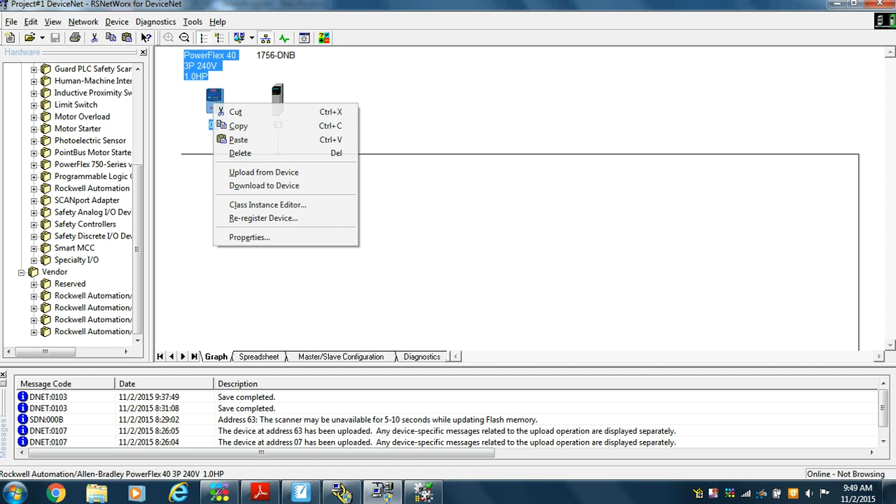While I was off, I had to come back into the properties of this drive because its parameters were not set right. Even though I set them before, they weren't on the COM port on 36 and 38. So I probably set it and didn't say apply, and didn't keep it. So I had to do that. Plus I had a hardware problem in that my sink/source switch was not in source, which it needs to be in.

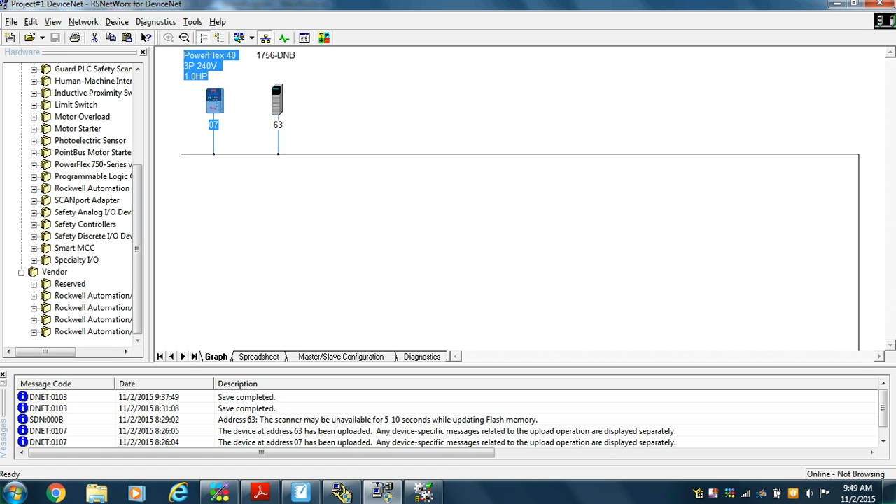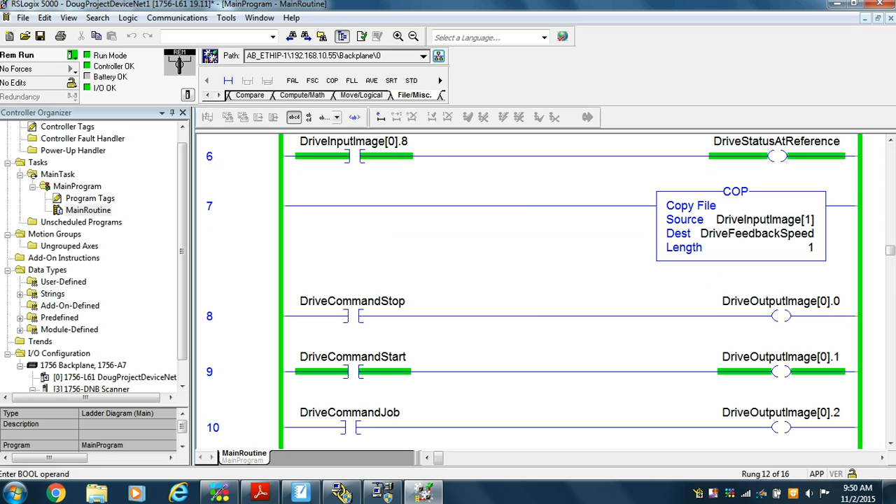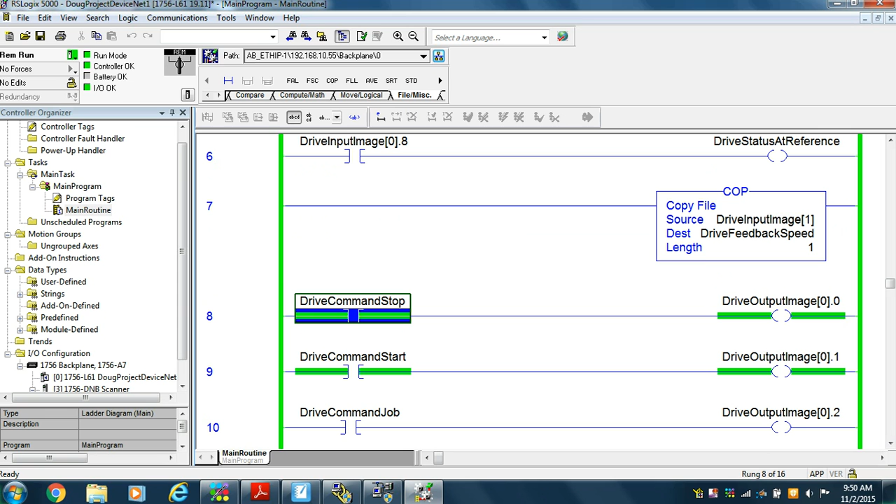I think you can hear the motor running in the background. So I'm going to turn off the motor. And you can hear it winding down to nothing, maybe. Not sure whether you can hear that or not. Okay, and that ends project number 1.